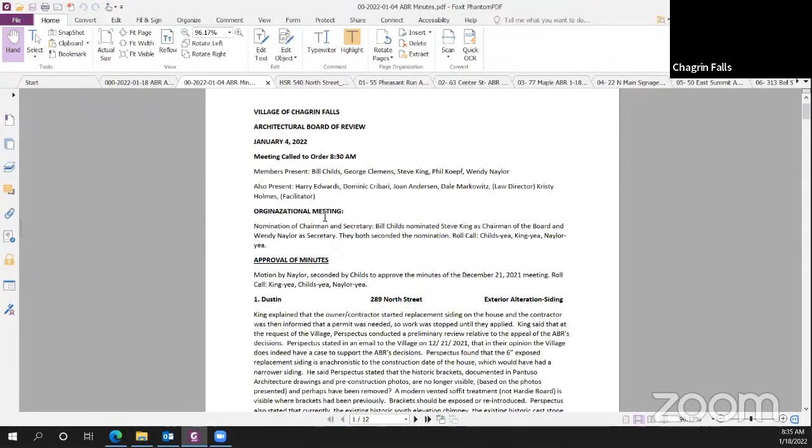Does it say that? Let's see, if you go to the bottom of this. Something in the minutes, because I remember there's a comment from Phil talking about how it only goes to the 4 square portion of the house, but I think you're right, George. We need to clarify that in the motion, that was the intent. Is that what you're saying? Yeah, I think we go all the way down to the motion.

Right, we just want to clarify that the changes we're requesting apply to the historic portion of the house. That'd be the original 4 square. Maybe that is clear enough.

Okay, and then the comment goes to the windows, right? Yeah, the windows were just the facade windows in that same area. Okay, so I think it's clear enough. Never mind, yeah I'm good with that. Are you good with that? Okay yeah, just in case, because the lawyers are gonna hash around with it.

I would add motion by Naylor, comma, seconded by King, and then basis for the decision is 1105.03 A and G, and 1146.01 A and D, as in David. And I would do a similar thing to, is it 65 West Washington?

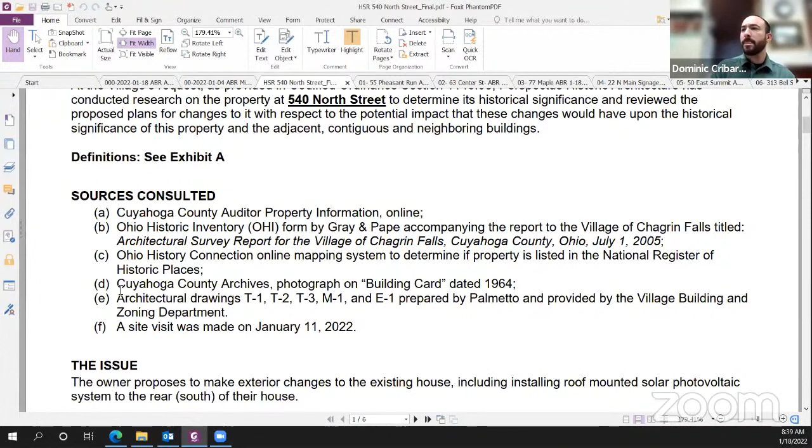The HSR for 540 North Street for the solar panels, you guys saw last meeting. Do you guys want to comment on that and vote on that real quick? Last thing on the agenda, or in the packet, I mean.

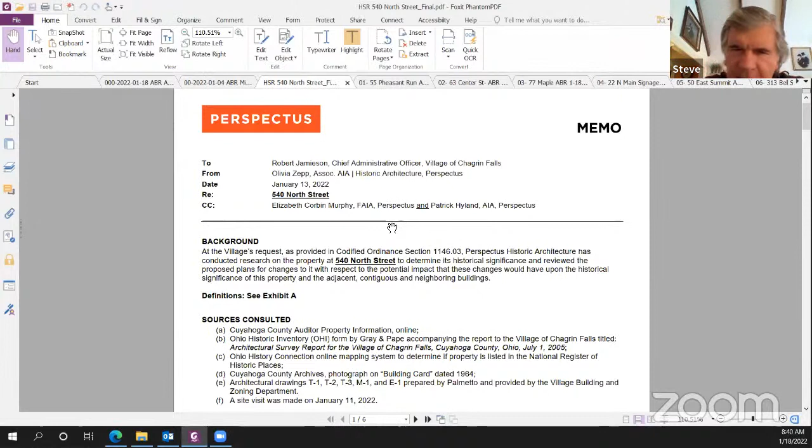Yeah, we didn't get that recently. We had that right after last meeting, I think. I just sent you guys this HSR with this agenda, but this was on last meeting. That was forthcoming.

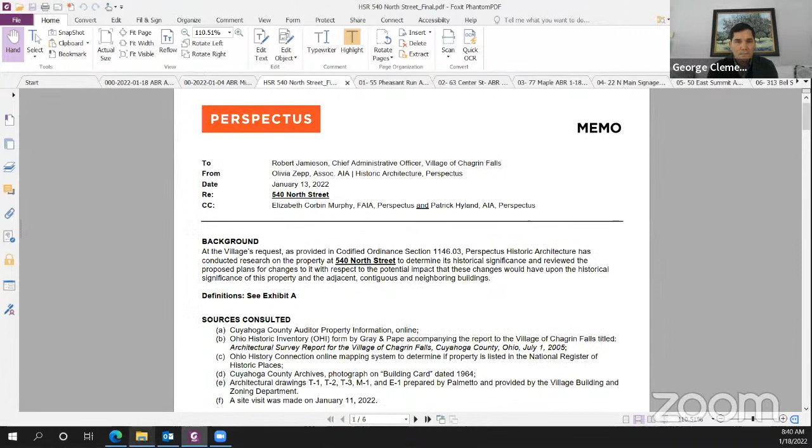Solar panels, I read it a few days ago. Oh, the blue house, yeah. Okay, this is the one where I was trying to figure out what orientation the house had. Right, relative to these. Yeah, we talked about it at length. Dominic, can you mute?

Myself? Yeah, I'm getting background noise. I don't know if anybody else is. It's hard to hear. A little bit, yeah, I hear it too.

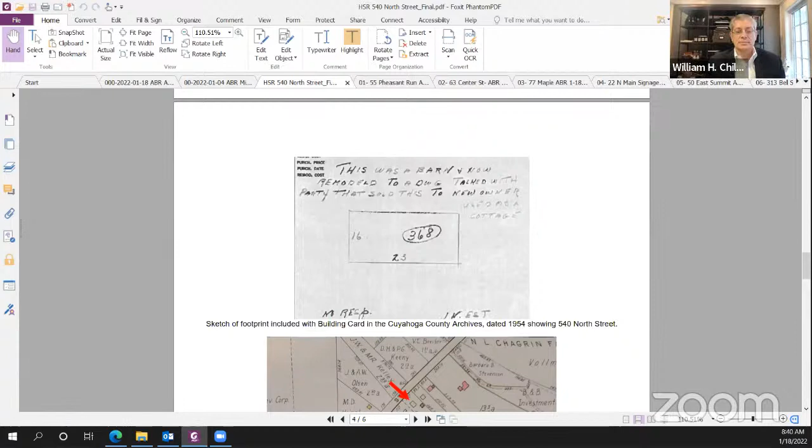Would you scroll to the meat and potatoes at the end, please? Here it is. 540 North Street does not meet the standards of historically significant properties defined in the ordinance. It would not have effect on itself or any historically significant properties in the area.

Move to receive the minutes and the report. Second. Motion by King, second by Naylor. Childs, yes. Naylor, yes. King, yes. Okay, thank you.

On to the agenda, 55 Pheasant Run, new deck and sunroom.

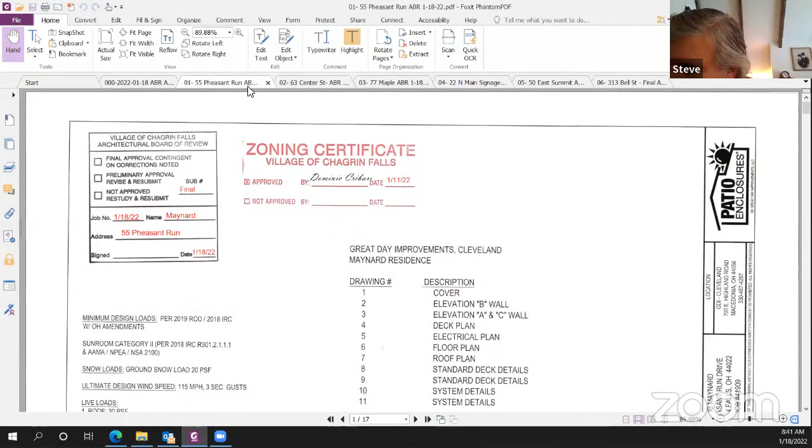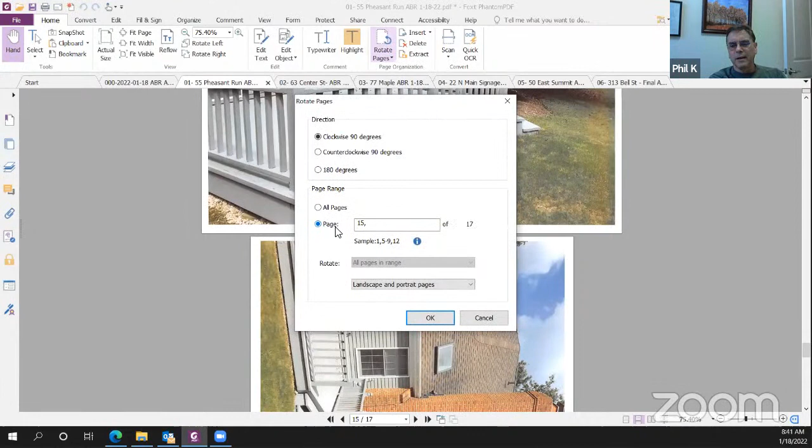Guess I'll start. The first question I have is, does Pheasant Run have an HOA and have they approved it? Yes and yes. That's fortunate.

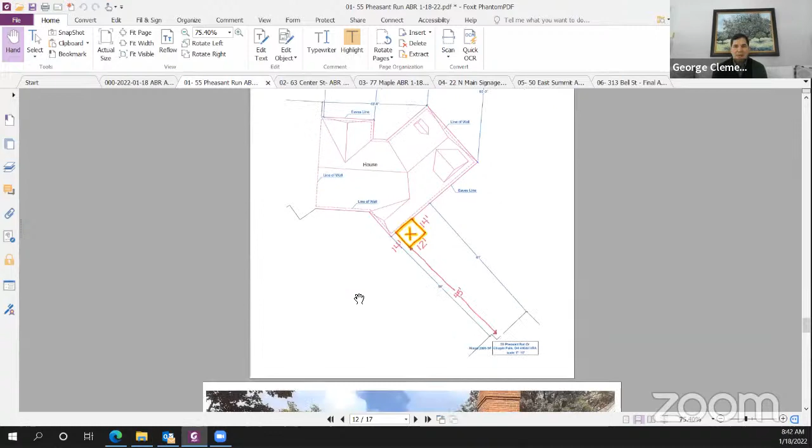Looking at the site plan for this area, there's not a lot of information on this application because they're just showing a portion of the building, but it's a condo, so it's a bigger, longer building. I think the rear of this condo faces a little circle, so the backyards all face each other. So I do think this would be a visible structure from the neighbors in their backyards. That's what they're going to have to work out. And I do not think it meets the architectural standards of the properties and existing construction.

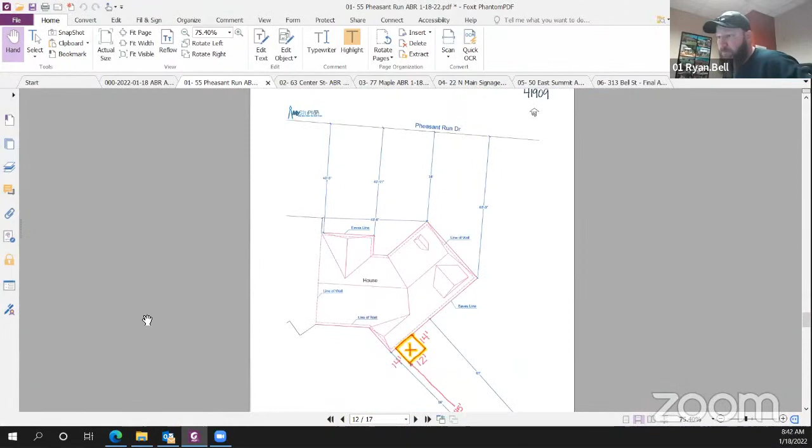May I make a comment here? My name's Ryan, I am the contractor for the homeowner. I completely understand, if you have adjacent properties, all the backyards look at each other. What we're building is pretty much a wall-to-wall glass enclosure. In terms of meeting the current architecture, it's not that we're going to be creating an eyesore. We're not making a circus tent here. We do these glass enclosures for million-dollar properties up on the lakefront, down to the suburbs here. It's a glass-to-glass, wall-to-wall enclosure. In terms of architecture, we don't feel it changes the design of the house or takes away from the architecture or characteristics of the surrounding homes.

I think that's our judgment, not yours. Okay, well, I was just putting my opinion in. That's all.

I don't care for it. I think at the very least, if they did a low slope gable roof form matching siding and matching windows, that would lessen the impact. Windows are sliders, everything else looks like double hung windows.

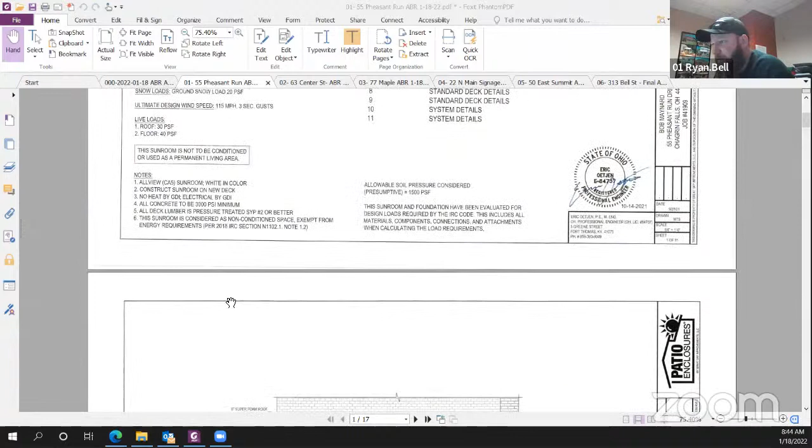So with the siding and the gable, that's all doable, obviously. In terms of siding, the only solid walls would be the foam knee walls, and we could easily turn those to glass and make it an all glass enclosure. The gable front would not have the foam wings, we could do that in glass as well. At that point, you'd be talking about an entirely glazed enclosure.

Now, you mentioned the double hungs, so we can't do any sliders? Unfortunately, our patio enclosure system does not include double hung windows. This isn't an addition, it's a seasonal patio room. It's different from an addition, a stick build where you've got plumbing, drywall, siding, and so on. This is meant to be something that is not part of the house, not a permanent livable space. It's a seasonal patio enclosure.

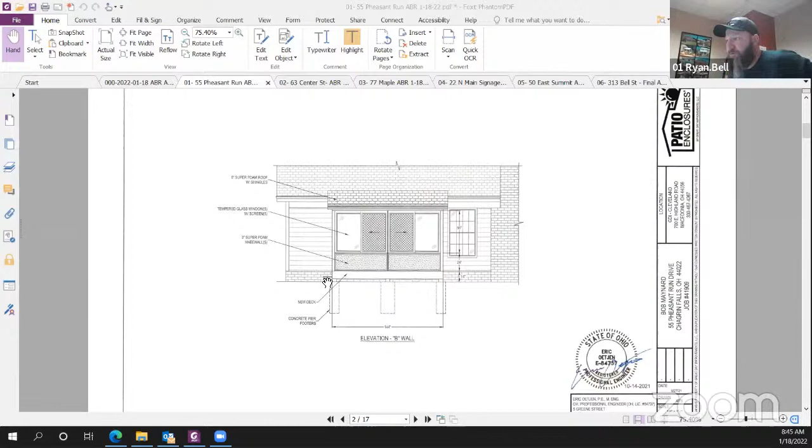It looks like it's not part of the house. It's not an addition to the house, no. Yes, it is. Well, it is an addition to the house. This might not be a project that fits your system.

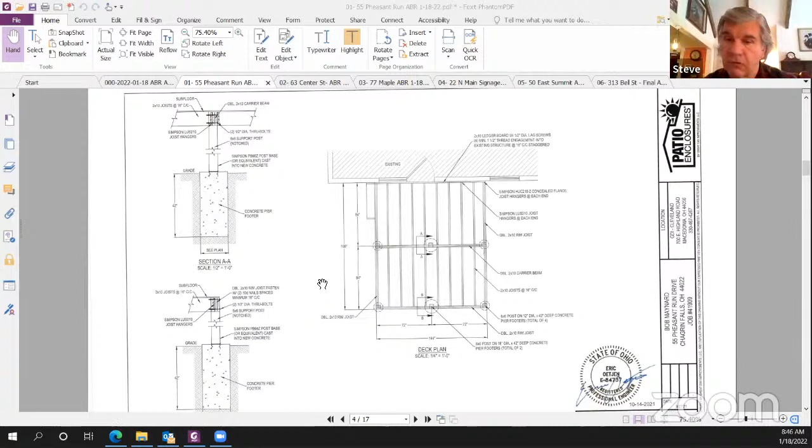Double hung windows, our enclosure system is a pre-engineered enclosure system, and we don't offer a double hung window in our enclosure system. It's different from a stick build. Okay, that's not a great concern of ours. If you're not able to do the project, I understand.

Would you go back to that? So I'm kind of wondering, are you guys superseding the HOA then? Because they approved the look and everything with it. Yes. So you guys would, okay.

Do you want me to go back to Steve? You're saying basically there's really not an opportunity based on your system to do these revisions, correct? So you would either go with this proposed design or not at all?

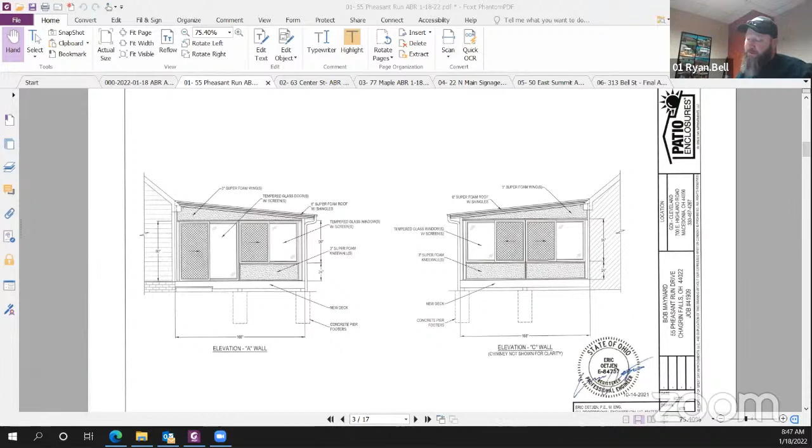I don't know if it's the HOA. So the HOA didn't require a gabled roof, but you, who don't even live in that development, are requiring a gable roof, is what you're saying. And you guys are determining what the homeowner can and cannot do, even though we have HOA approval. You're still denying them the ability to express their own style.

We're here to protect the architecture of the entire village, and that's part of the village. The little local groups have neighbors, and they don't want to crap on neighbors and this and that, so we have to protect the architecture for the entire village. I don't think this fits your system, and I would move to revise and resubmit.

Second. Okay, Bill, give them direction on what they're looking for. Can you guys give full direction on the revised resubmit? What are you calling for exactly? Hold on, I mean you're supposed to tell me, and I'll call the roll, then put the comments in.

So that was motion by King, second by Naylor. Childs, yes. King, yes. Naylor, yes, with the comments including revision to include a gable roof form, and to make the proposed siding and windows match the existing siding and windows.

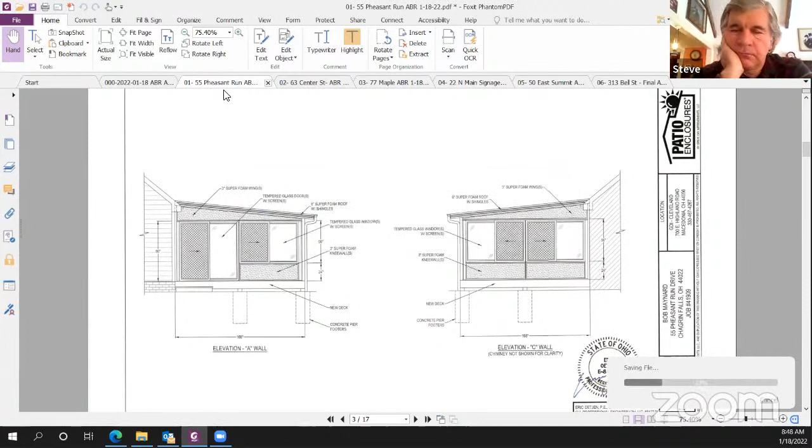Do we have anybody presenting for this? Stephanie's on. Stephanie, if you want to unmute. I don't know if there's anybody else presenting with you, Stephanie. Just let me know, I don't notice anyone else on the attendee list. Maybe raise your hand if you are on this project besides Stephanie.

I am presenting today. I'm not sure if Andrew from Pintuso Architecture is listening in, in case there are additional questions. Stephanie, can you state your name and occupation for the record please? My name is Stephanie Osborne. I am, I guess, a homemaker. I live at 63 Center Street.

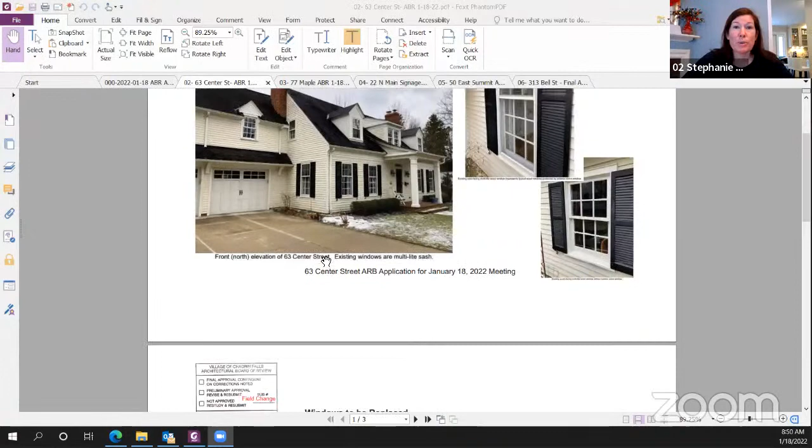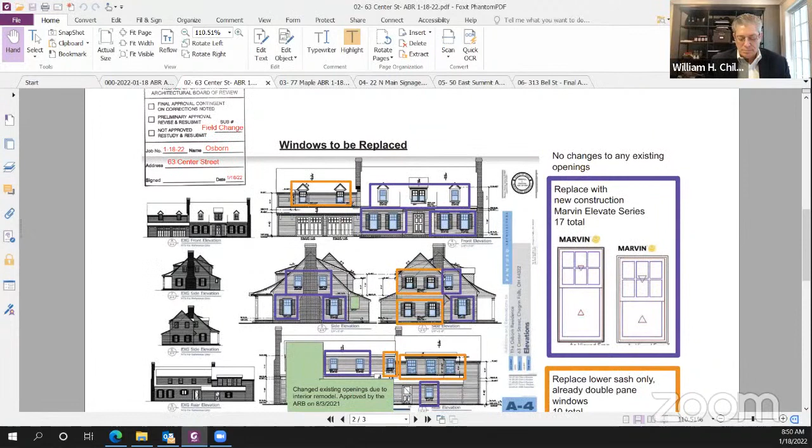Our house here is a Cape Cod style house, built in 1963. I'm here today to ask you to reconsider my previous request to replace the windows with a different style. We currently have multi-light top and bottom sash style windows, and we would like to change those to a multi-light top sash and a single light bottom sash.

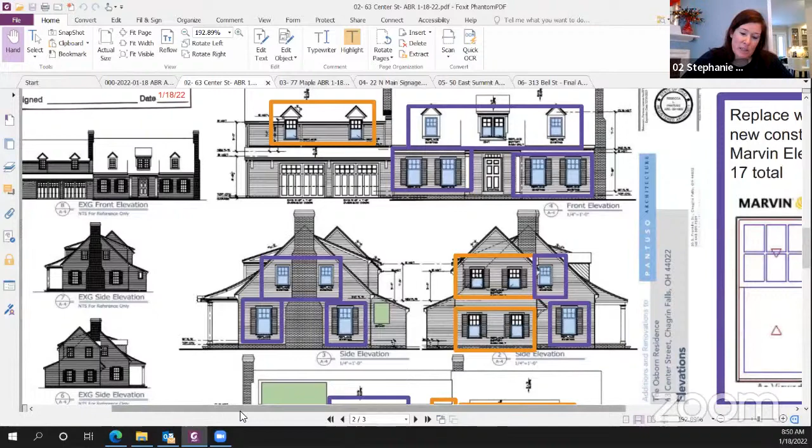The modification, we believe, fits with the existing scale of the home and the style of the neighborhood. We would like to propose to install the Marvin Elevate new construction windows. This quality, energy efficient window will reduce our heating and cooling costs and be better for the environment. Other homes, including century homes directly neighboring our property, and many more homes within 2 blocks of us, have the multi-light top sash and single light bottom sash style windows. Perhaps this charming Cape Cod from 1963 could better complement its neighbors.

The 3 pages of pictures we've submitted: the first shows our existing windows, and the second shows what we would like to replace them with, the Marvin Elevate. 17 of those windows would be the new construction Marvin Elevate, and 10 of them are from an addition about 12 years ago, so we would just replace the bottom sash to match the Marvin Elevate. The ones outlined in orange are newer double paned windows.

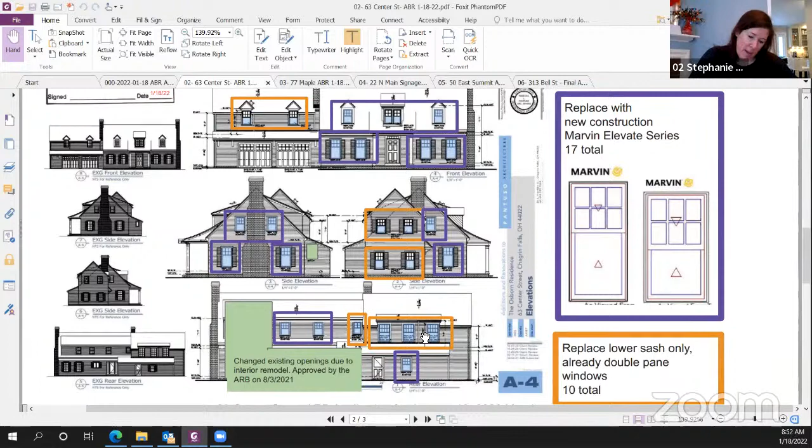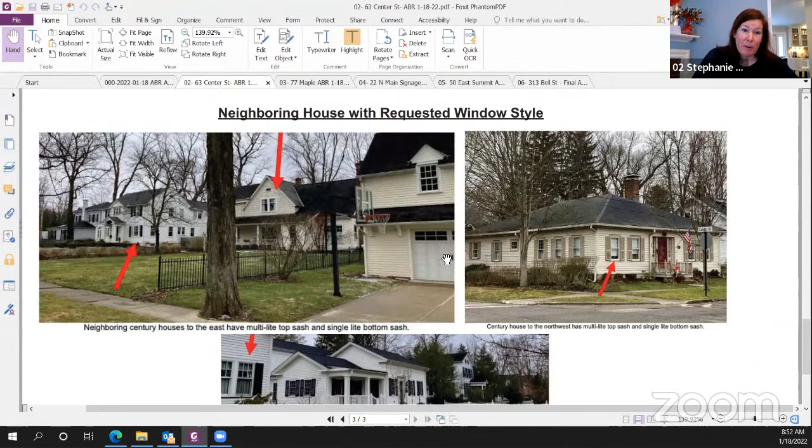On page 3, the last time we met, Mr. David Griffith's house was cited as a notable architectural gem of the village, and I absolutely agree with that. That house is 2 doors down, shown in the first picture on the far left with the first arrow coming up from the bottom. That certainly was an inspiration to me in coming up with this idea, since they themselves have the multi-light top sash and single light bottom sash window.

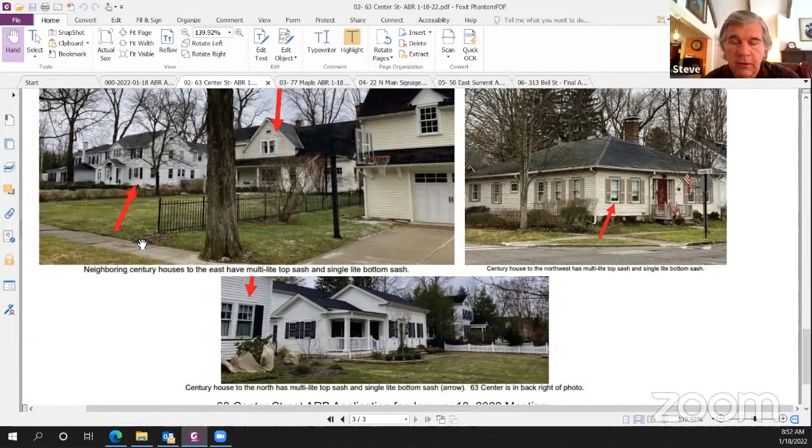We view each house separately, and they have different architecture and different needs. The one in front of us is a cottage looking house, and it has cottage windows, which is sort of the vernacular for what you're talking about.

So every house is different, and we judge them accordingly. In this particular case, what's great is we do have in the HSR a historic image of your house, which is beautifully built. It blends so nicely into the village, quality materials. And I see where the windows were installed as true divided lights. I believe that's what I'm seeing, right?

So just to reiterate, we know what the existing window configuration with this house is. And so I would recommend going back to what was shown. You could do aluminum clad, you could do simulated divided windows. You don't have to do the true divided.

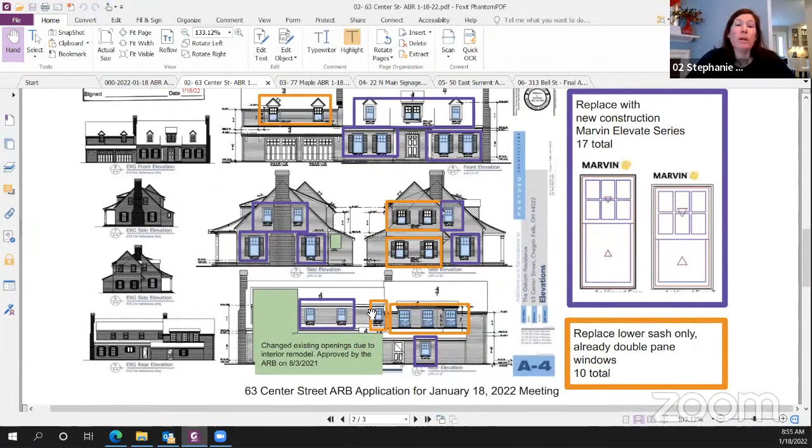Okay, so just for architecture in general, I was wondering, does architecture evolve, or is it always in the moment and does not have some wiggle room? It's black and white, yes and no. Well, we do each house individually, and eventually we give you our opinion, and that becomes black and white.

Okay, so there are no options on windows for this house. There is only one style that is acceptable. You can put in very energy efficient windows that will fit the house and be very beautiful.

Yeah, and I think for this case, that's a Cape Cod, and that for sure has the double hungs with the muntins in the top and bottom. I don't think that style can start transitioning and be a different style. I think you want to keep the purity, and that's what makes Chagrin Falls so great. You have these great historic houses that capture their time period, and that's why everyone loves to come here. It's the feel, and I don't think you really want to lose that, like a lot of the other communities have throughout Northeast Ohio.

I do appreciate the architecture and know that you help preserve that, I guess. Buying a house from 1963, it was modeled after a Cape Cod, right? I mean, it wasn't built in the 1800s or something. Right, but it has the massing and the characteristics, the dormers.

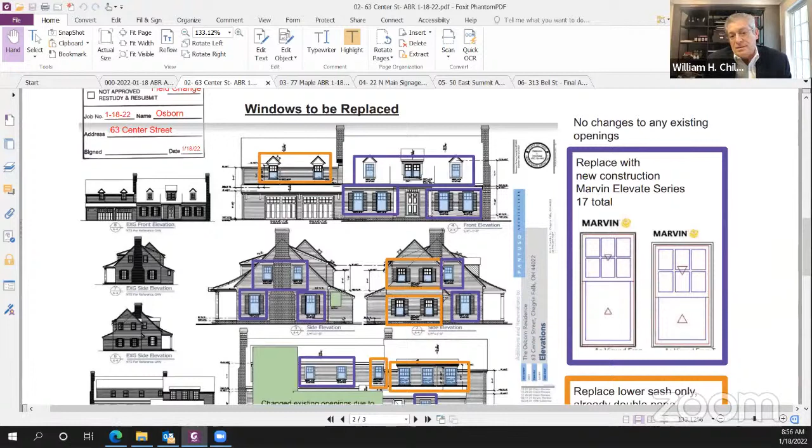If you look at any type of book that has styles and things, this book is pretty dead on, it would show you that this is Cape Cod, and it has all the characteristics and the features and the massing and the composition of what that house would be. It is a beautifully done house for that particular era, 1963. And it is advised that you stick with that character. When you start to break from that, it starts to take away from the historic value of that house, and you are entering into that historic era. So yeah, I would stick with the multi-pane.

Okay, well, it was noted in the historical report, if I read it correctly — it's the first time I've been exposed to a historical report — that by adding the dormer in the middle of the front and covering over the front door, that eliminated it from the National Historic Register. No, absolutely not. That does not destroy the character of the house. It does not eliminate it from qualifying as a contributing resource.

Okay, Dominic, did we have a previous ruling on this? In August. And it was, I'm sure it was no, but... do we reaffirm it, or do we do a new motion? It was actually back in March last year. Yeah, there was one before I was here, in March. Yeah, like she was saying.

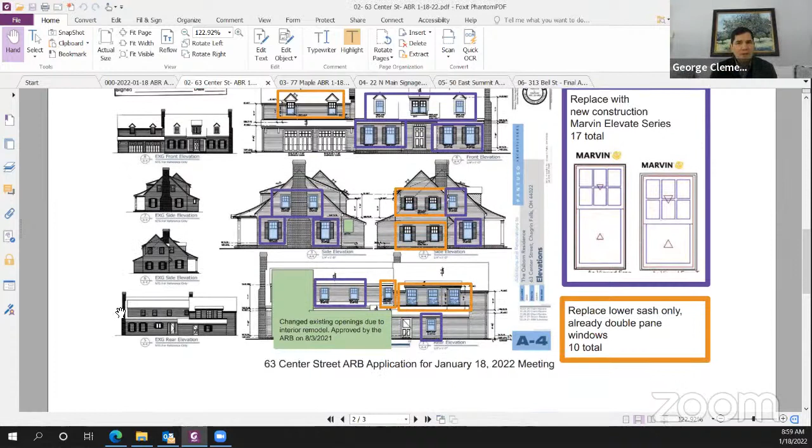Were they presented as 6/1 windows at that time, or 8/1 divided top? At that time there were kind of two parts of the project: the overall windows in the house, and the interior renovations that affect the backside of the house. So the decision got broken into parts, and the renovation part was approved, but changing the light from multi to single was not approved.

With the comment about Mr. Griffith's house, I wanted to be heard out again on these windows alone, which I appreciate. You're pointing out that March minute, which I think is helpful.

I think it's actually helpful for me to understand that it's really the Cape Cod style that's dictating the divided light top and bottom. I think what you're proposing is pleasing, and it's understandable why you'd like that. There are many houses built earlier than this one that have the 6/1, which is what you're proposing now, but it's really more specific to the Cape Cod style. Maybe that helps you, as it helps me understand exactly where this is coming from.

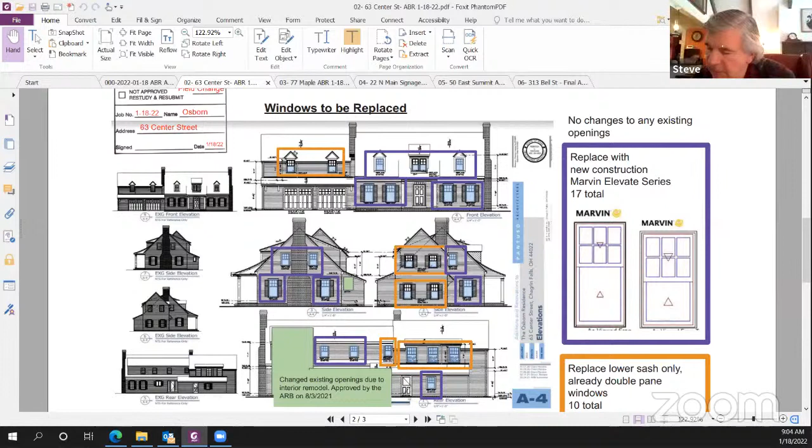77 Maple Street: new steps to the front porch, HSR on file.

I don't know if we have someone presenting this. It sounds like someone's here. We're just waiting on Katie to switch out Miss Osborn. Iris, here I am. Alright, Osborn's still in though.

What does the HSR conclude? That HSR was from a previous submission for the porch. Do you remember what I said? Harry's going to bring it up real quick. Steve, if you recall, the previous submission was for the porch. The gentleman who was selling the house made like three renditions of windows and stuff like that, and I think you denied them.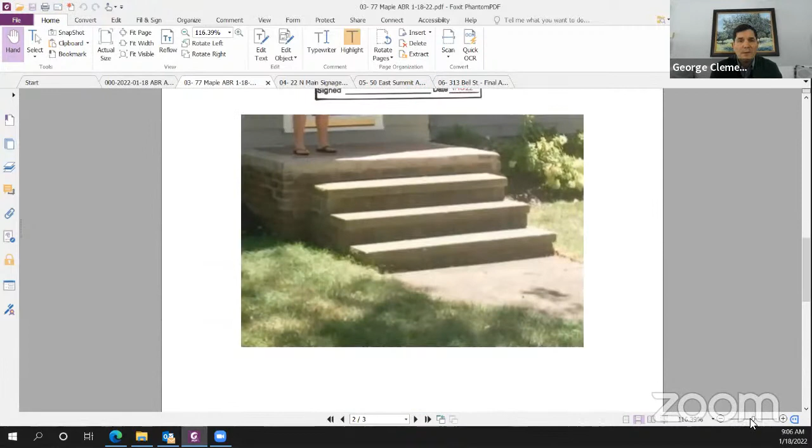I think that making those into either stone top brick steps or brick top brick steps, I would consider that to be an improvement to the house. I do want to note that you haven't gotten as far as having drawings on how you do that - those brick steps will need a foundation. The top landing would be a minimum of 36 inches wide. So the steps you have there don't really conform because you've got the steps right on a door and they want a 36-inch wide landing. I think that would be an improvement as well.

You also need to show that you're either moving the existing handrail and keeping that, or you need a handrail because you have more than two risers together, so more than one tread. The handrail now is damaged and it will be replaced. You should show a new handrail. Based on that, I think the steps we're looking at are not historic - they've been replaced - and making them into masonry steps would be more long-lasting and more successful, I believe.

So when you said, George, the top landing 36 inches wide or deep? Wide or deep - projection from the house being at least 36 inches, so as you walk across it, that gives you a legal landing. It's 36 minimum - the code requires that where you have a door that opens out... No, it opens in. Oh, it does. Okay, because if it opened out, it would need to be 36 inches beyond the door swing, right? Oh, that's true. Yeah.

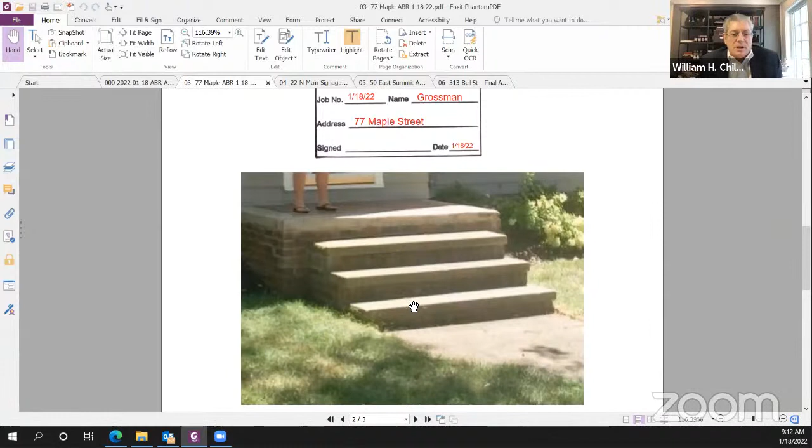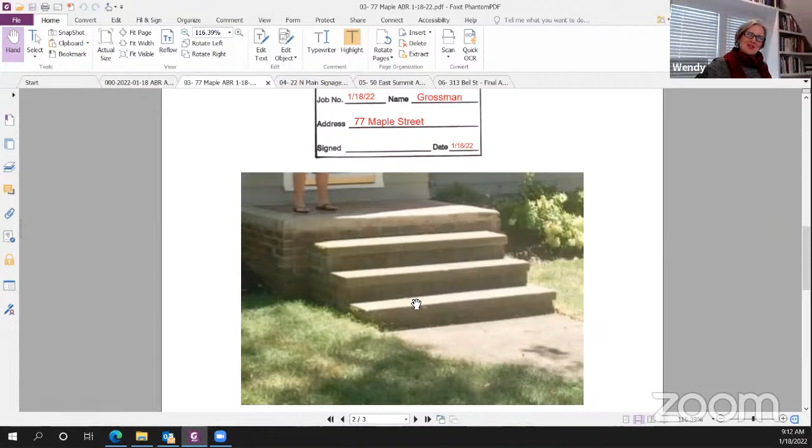It might go more with the rusticated concrete block on the foundation, since that has more texture, so it might be more appropriate. Limestone can be slick, and brick is less slick but harder to shovel. Or sandstone—we've all lived with these materials. It's all kind of in the finish of the stone too; usually it's got good tooth on it, so it's not that smooth, and therefore it's okay.

Do we need to call the roll? Do we have a motion and a second? We have, I believe, revise and resubmit—motion by King, second by Naylor. Childs, yes. Naylor, yes. King, yes.

To revise and resubmit, and thank you. For the record, could I get your name, sir? My name is Ira Grossman. And you are the homeowner? I am the homeowner, yeah. I didn't want to just assume that. Thank you very much, have a great day.

22 North Main Street.

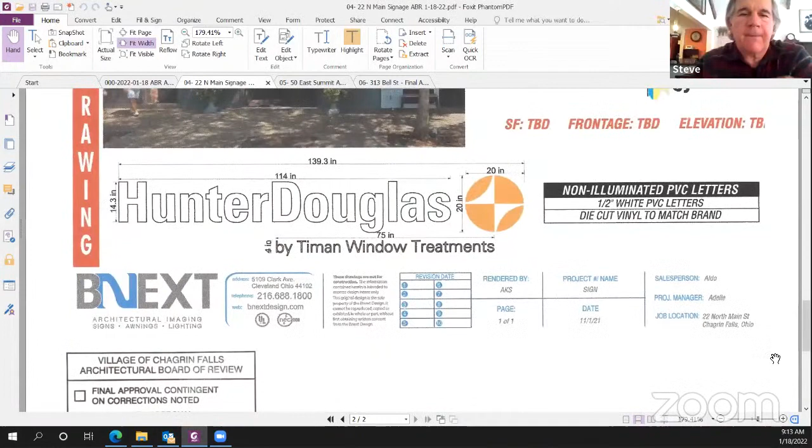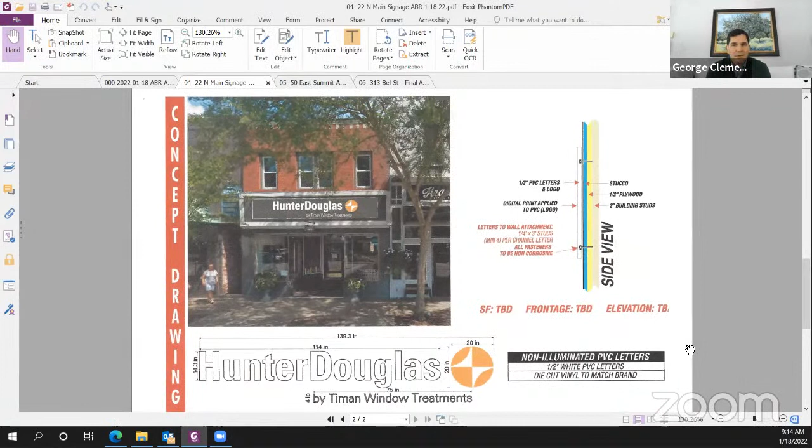I don't love that font and look, but I assume it's very striking—that's their logo. And just because I like the way Heartwood looks way better than that doesn't mean they shouldn't have a sign in town, I guess. So maybe smaller.

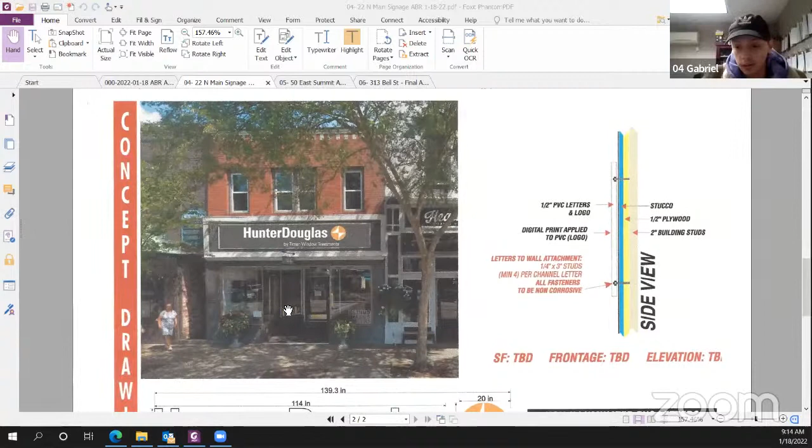Who's representing the digital print sign company? Is anybody here? My name's Gabriel, I'm representing—I'm the installer here. The approved drawings are right there, under my name, for Advanced Installation Service. You represent the sign company? Yeah, the installing company. Gabriel, what's your last name for the record?

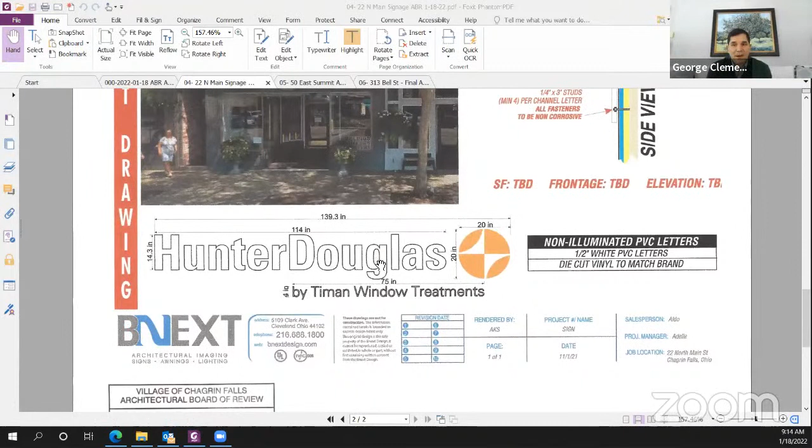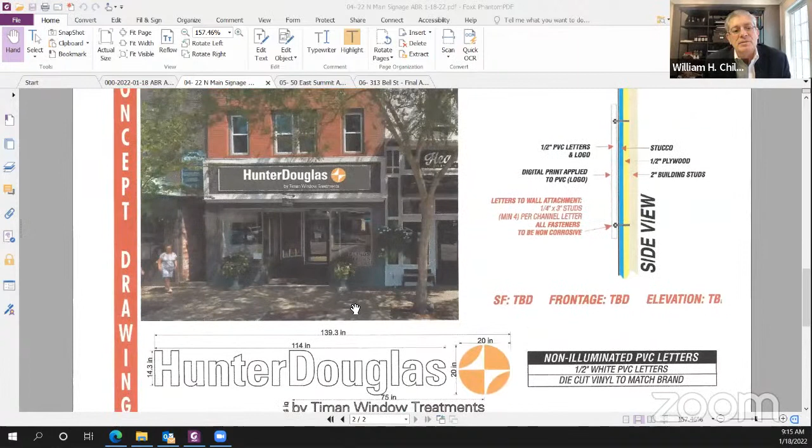Bartlett, Gabriel Bartlett. Could the Hunter Douglas part be a little bit shorter? It seems really bold and stands out quite a bit—maybe a little smaller. Just a thought, I don't know what everyone else thinks. I don't have a problem with the sign either, and I realize that's their logo, but it just seems pretty heavy.

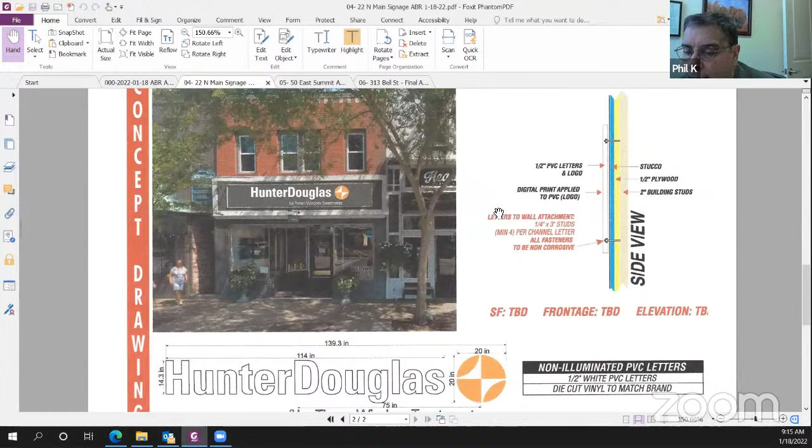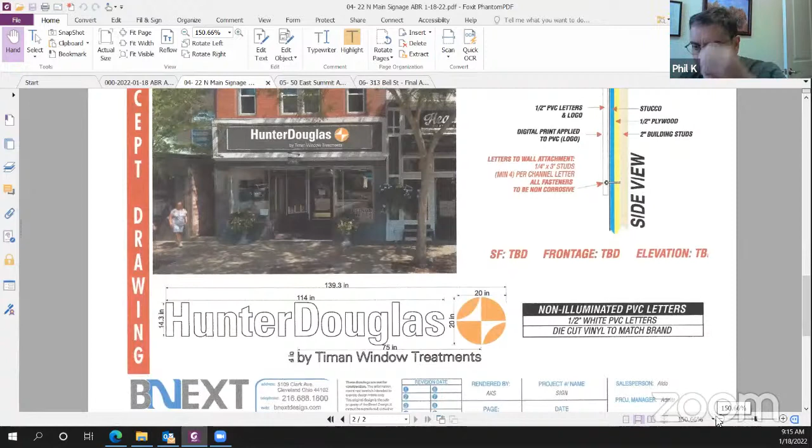My problem is not so much with the sign as the sign band. I know the building was sold—a client of mine owned it—and they're contemplating renovating the storefront. So my recommendation would be that when they do that, they make the whole sign band smaller, and then I think the Hunter Douglas sign would actually seem more appropriate, even though it's pretty big.

How about the Hunter Douglas text underneath the photograph? The black on white—right underneath the photograph is Hunter Douglas with their insignia, and that would be less bold, with a white background. That's really the difference—hollow letters instead of solid letters, whatever you call that font.

Are you just using the existing frame and replacing the letters? Is that what's going on? Yeah, that's what they're doing. They're contemplating a change to the facade—that's what I was told. I was contacted by the contractor who works for the new owner.

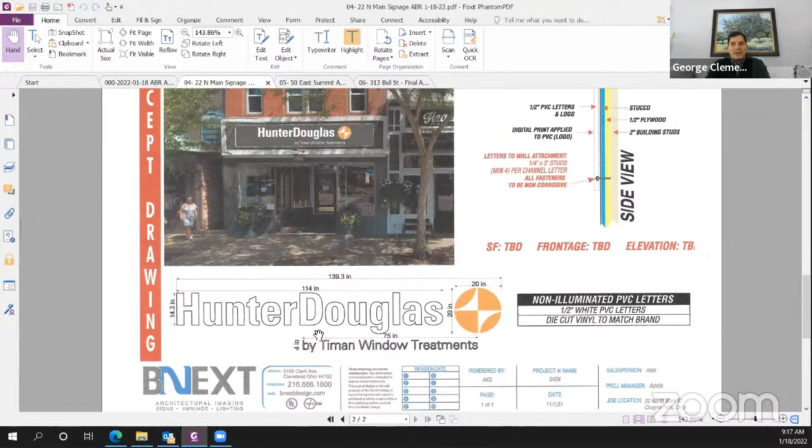So when you're referring to the sign band, Phil, you mean the brown surrounding everything, sticking out 8 or 9 inches from the wall? Right, it is awfully heavy. That's existing, huge. And the interior pin line around the front is existing too. So we're stuck at the moment—potentially a white background or smaller, and then we could address the sign band when the renovation is proposed.

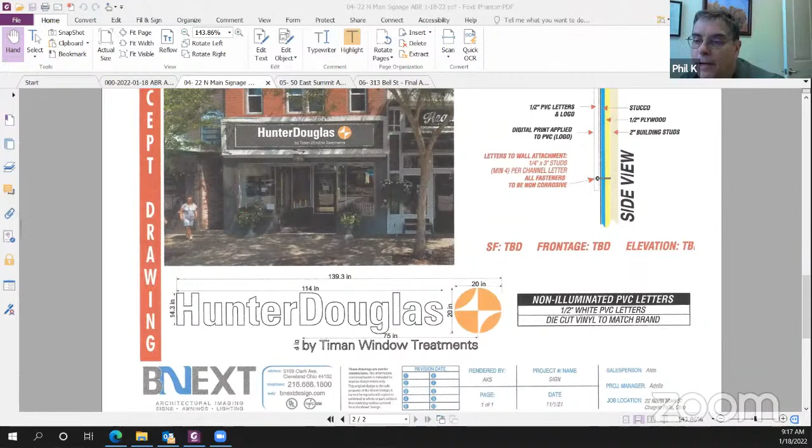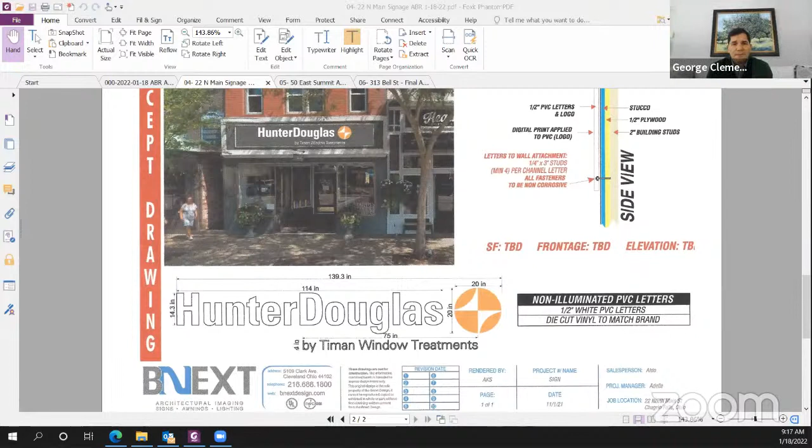I don't know what they do in the meantime. I don't think we can wait on a proposal that isn't actually proposed. But what I'm saying is we could ask that the sign be on a white background or a little smaller. And if they do that on a big placard or whatever, if they come in later, we can't ask them to change the sign band now, I don't believe.

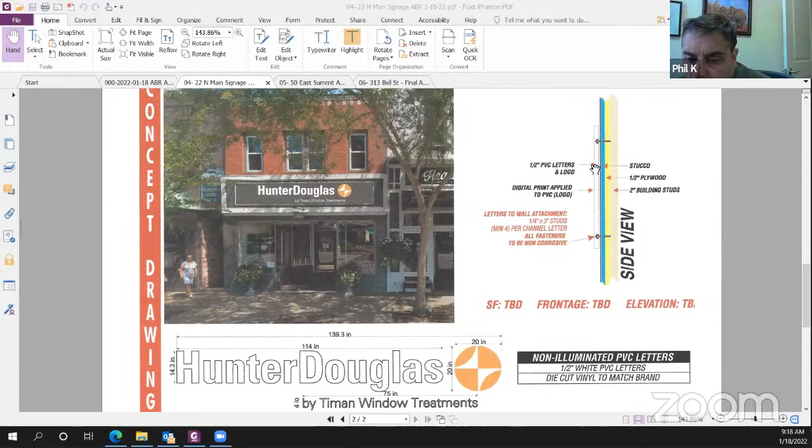So if they come in for a renovation later, then we can ask that the sign band be scaled down and they could reinstall the sign on the new sign band. Are they, Gabriel, installing this on a new background? Meaning, are you just doing the letters and logo, or are you doing a backing board? Oh, okay, I see your question now. Let me look over this real quick.

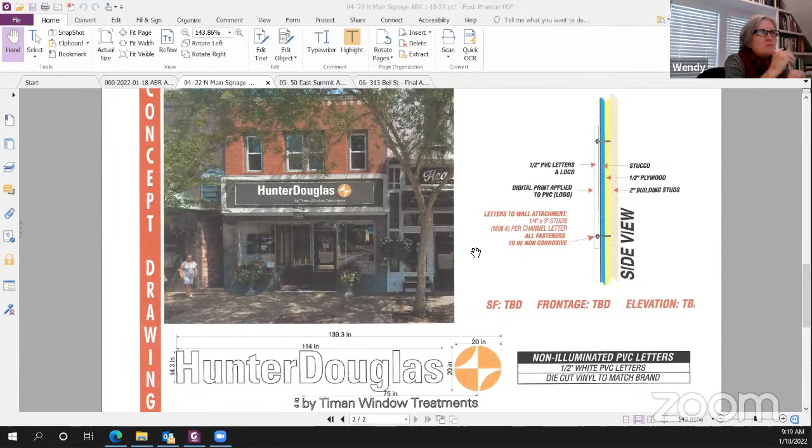It's just that the way the Timan sign is there now, the letters are scaled down considerably - it's a large T, but then 'Timan Custom Window Treatments' is much smaller lettering. This Hunter Douglas that's being proposed reads very much larger to me. If we agree, we could just scale the letters down, scale the whole thing down a bit, I think it'll look better. You could leave 'Timan Window Treatments' the same size and maybe scale the Hunter Douglas.

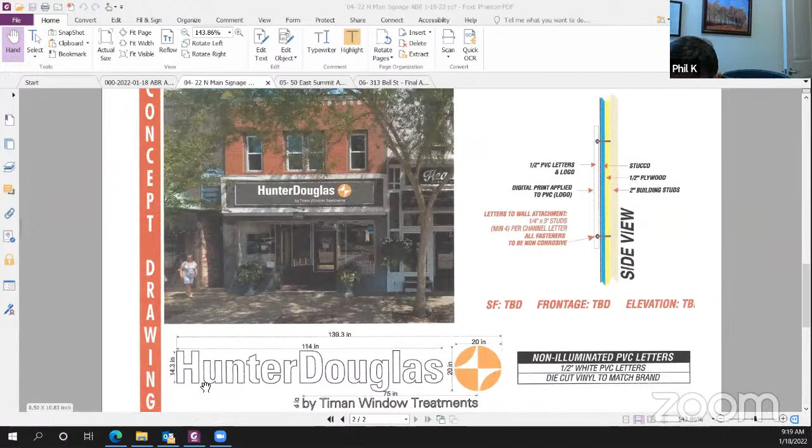That whole part of the sign is 139 inches, and if it were, say, 100 inches... just bring it down. We're talking about dropping the letter heights down from 14 to 12, or maybe 11 - just to see what it looks like.

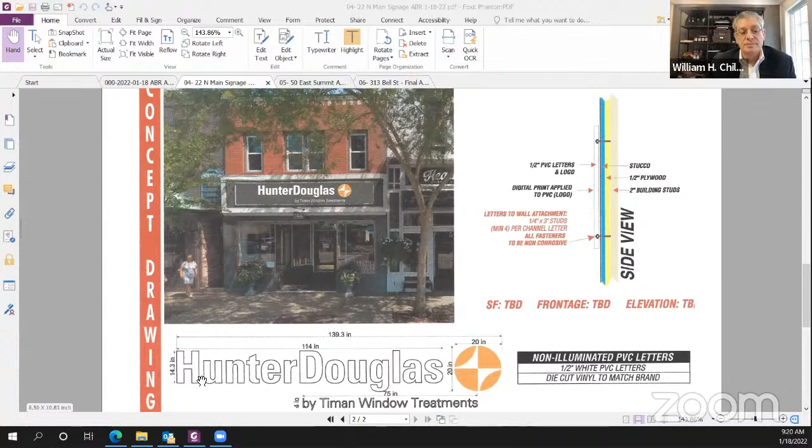I move to revise and resubmit, given those comments. Second? Motion by King, second by Naylor. Childs, yes. King, yes. Naylor, yes. Motion to revise and resubmit.

Very good. See you in about two weeks. Awesome.

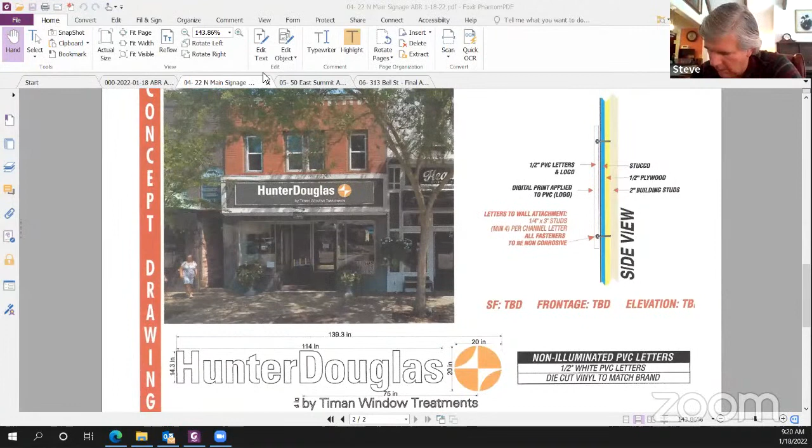50 East Summit, Clarke. New rear addition and screen porch in the rear of the property. Why are we looking at this again? This is the rear yard addition. Yeah, this is a completely different project, Phil.

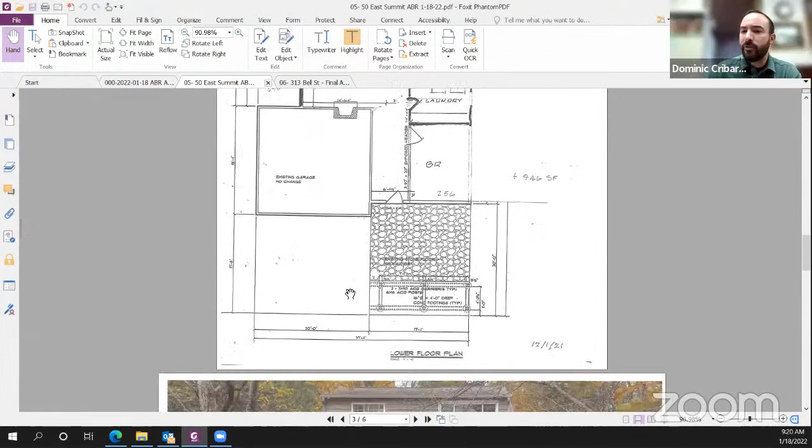I think the front - Mr. Gates had walked in. Oh, he did a walk-in while he was submitting for his variance. Now that his variance has been officially submitted, and he took the comments from the board, he proposed a new drawing here on the rear.

So, Mr. Gates, if you can unmute yourself. Brian. Can you hear us? No. You might need to turn up your volume or turn on your microphone on your end, Richard. You there, Richard? I'm right here. All right, there you are now. I don't see you. We don't see you either, but we hear you, so that's something.

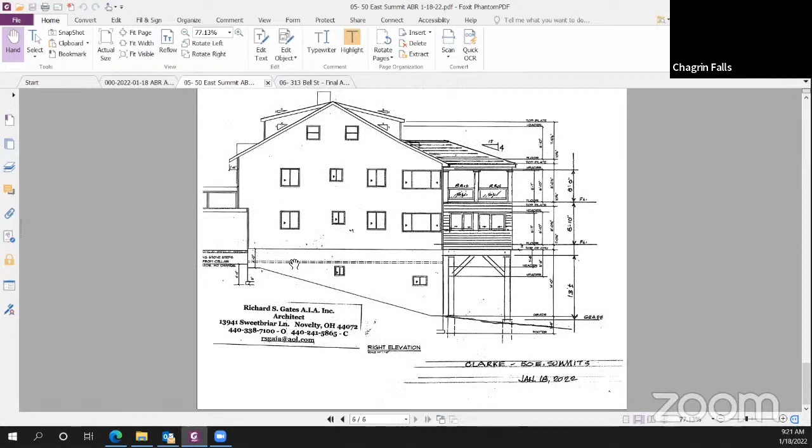I don't know where the button is to share screen. Can you see my screen where I'm showing your drawings? Yeah, okay. Richard, you can always unmute your camera. Where do you - kind of in the lower left, if you move your cursor around you might see something pop up that says 'start video.' Click it one time and make sure you don't have a cover on your webcam. There you go, you're here - success!

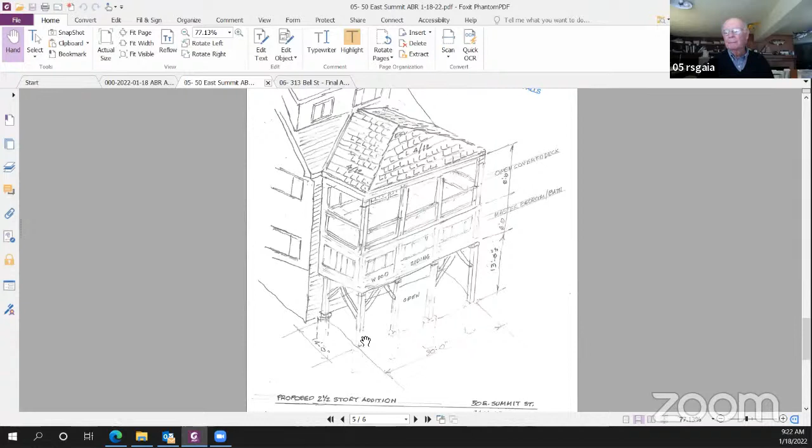This is Richard Gates, I'm in my office at home. So when we walked this in the first time, there were some comments - my original sketch was worked from standing on the ground and trying to guess what's going on with the roofs. In the meantime, we've done an aerial view, we've field-checked it, and revised the drawing to look like what you're looking at now. So the upper level is a covered porch, and the lower level is a master bedroom and bathroom addition.

Sure, master bedroom and bathroom addition. Okay, so you've got a roof over that addition underneath your porch.

Correct. I'm not sure I saw this last time, or at least I can't remember the walk-in. You weren't there, George - it was right before Christmas.

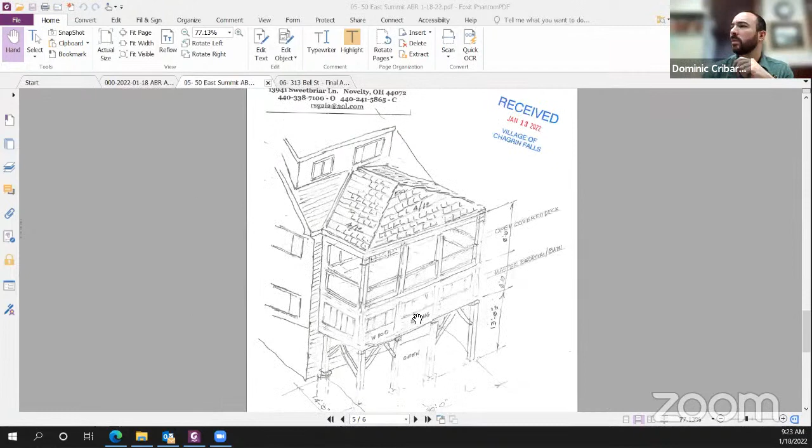Okay, so my comment is, looking at the existing rear of that building, I do think this addition is going to add a lot of dimension, which would be welcome. And the horizontal siding seems like a good solution. The hip roof actually seems like a pretty good solution to me.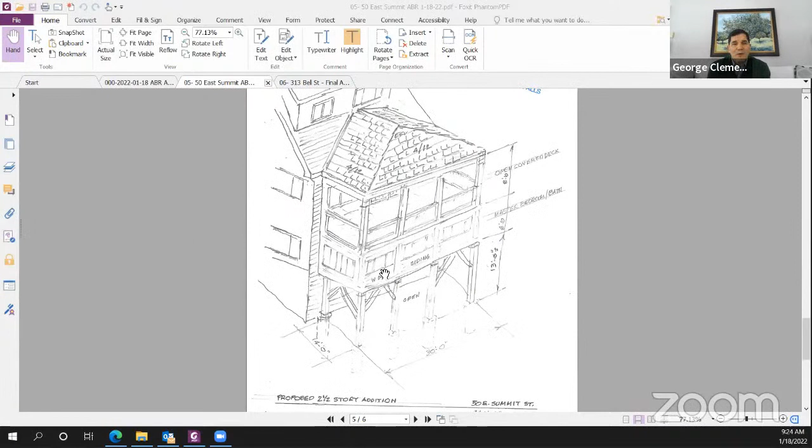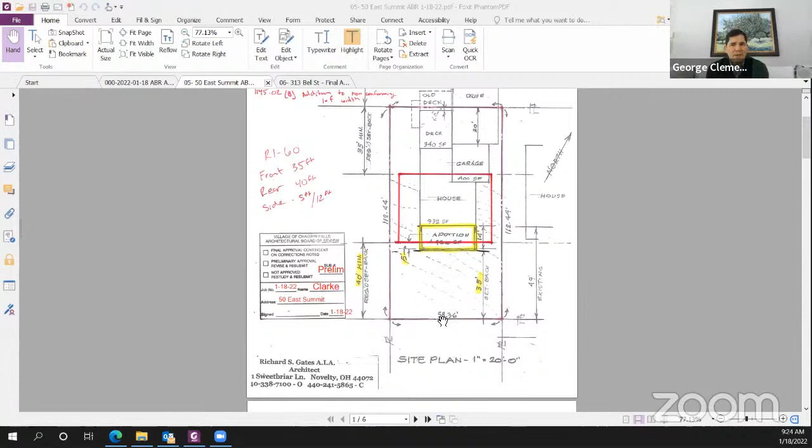What's the variance request for, Harry? The rear yard setback, 5 feet, leaving 35 feet. But what you're looking at now is this huge blank thing, and this has a lot more going on. Oh, it's much more appealing. Yeah, I agree.

I move to preliminary approve this, looking forward to seeing the drawings. Second. Motion by King, second by Naylor. Childs, yes. Naylor, yes. King, yes. Plans have been preliminarily approved.

All right, thank you guys. Thank you, Mr. Gates. We'll be back to see - we have to get this thing zoning approved first, and then we'll be back with the final drawings. Very good. Okay, thanks for your time. Thank you.

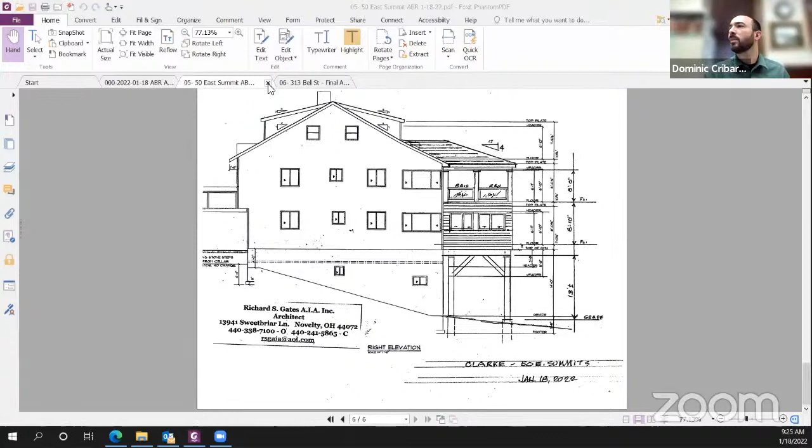313 Bell Street. The addition, the front porch and side porch addition.

Pretend I'm moving around to the front of the table. Katie, can you remove Richard? Yeah, hi Richard. Hi. Now go figure out how to turn it off. Yeah, go away, I don't know. You guys get rid of me, I don't know how to do it. Pull the plug, put your little screen over, put a piece of tape over your camera, and then don't talk. Should say, Richard, if you can, it should say leave meeting somewhere by the bottom right corner. There we go. There he goes. Okay.

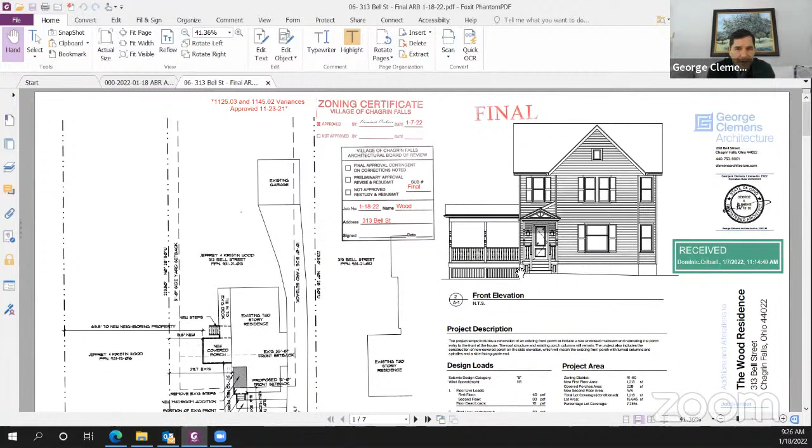Okay, so you saw this porch project, and it was very similar on a preliminary basis. This is back for the final submission, and although it has not changed much, we really did look at the comments closely, and I just wanted to assure you that we took the comments of the board seriously in terms of the porch and the porch posts.

We like - if you added one more post and broke that into 3, there is something nice about it. But my concern was originally, and it remains, that for a porch of this size, we're going to get a little forest, a little thicket of posts, and in reality it will be less pleasing with too many new turned posts. So that's why we stuck with the post configuration that you see.

We have the porch that projects from the side. I think the entry porch that we're partially enclosing into a mudroom - I'm excited about that. I think it's actually an improvement because of turning the steps to face the front, leaving the original roof and posts of that porch, so I think it takes the historic fabric and makes it work a little better. It also makes the door a little more prominent, brings it forward.

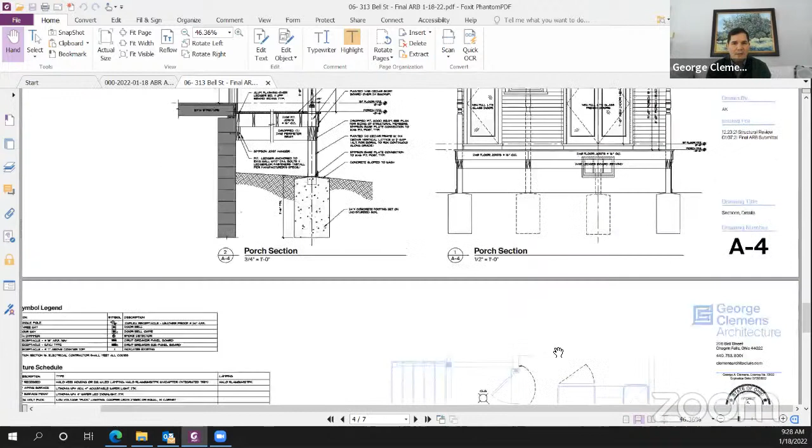But the side open porch is 14'8" front to back from the front of the house, so it's not projecting right there at the front. I think this element is really critical for these guys to be able to enjoy this wonderful side yard they have. They have, I think, 25 feet to another 50-foot lot which they own, so we're looking at 75 feet of open space there, and I think this nice open porch is going to give dimension to that. The reason the porch is sized the way it is, is so that they can actually have a couch on that porch to view that big side yard and enjoy it.

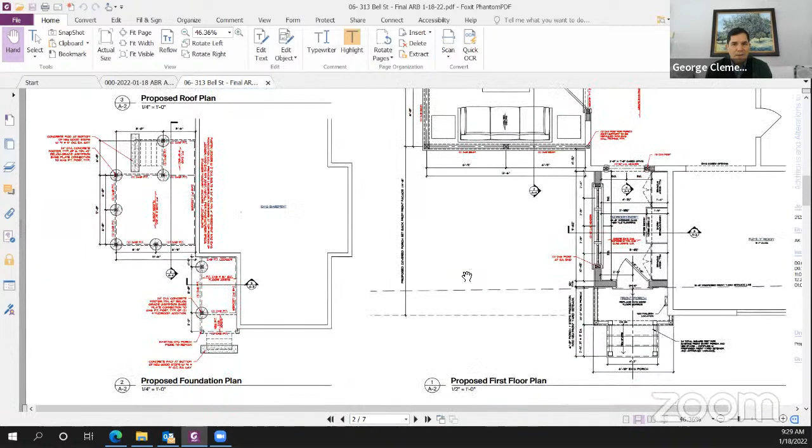So we are trying to scale the side porch in a way that works best for the Woods, and we think it looks nice. It's about a square, running with its side facing the gable, and I think it's successful at that dimension. Those are really the elements: the open porch, the new mudroom enclosure of the existing porch, and moving the steps to face the front.

I like how you added the little mudroom entry. I like the whole thing actually, because in a time when we're seeing these tiny little houses with huge unmanageable porches, this is scaled well for the size of the house.

I understand that we might not be sticking to the column spacing that works classically, but I agree with you that you don't want a forest of posts on a 14-foot square porch, or whatever that is.

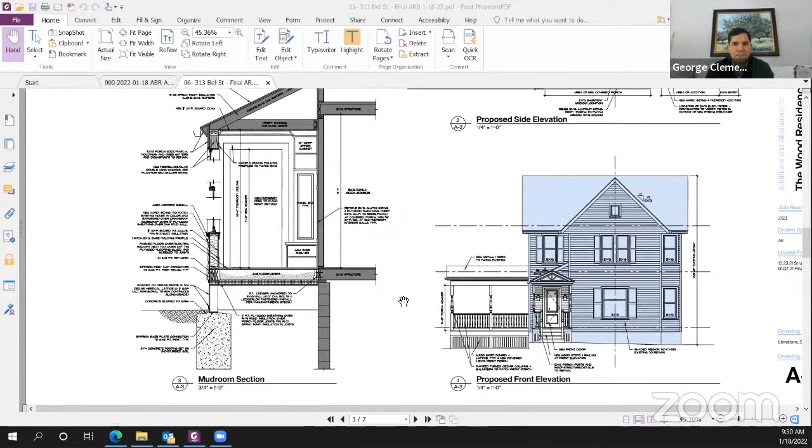I just think I like it. I like the transition. I can take or leave the decoration on the gable end of the porch - I don't know that it adds a lot, but I love it on the front entry. I think that's pretty, it adds something to the front of the house. So those are my comments.

I agree with Phil, I think this is really well scaled. Thank you for that. I think it's a relatively modest porch with what could have been going on over here. I went up and took a walk to take a look, and there's a very flat plane on that elevation as well.

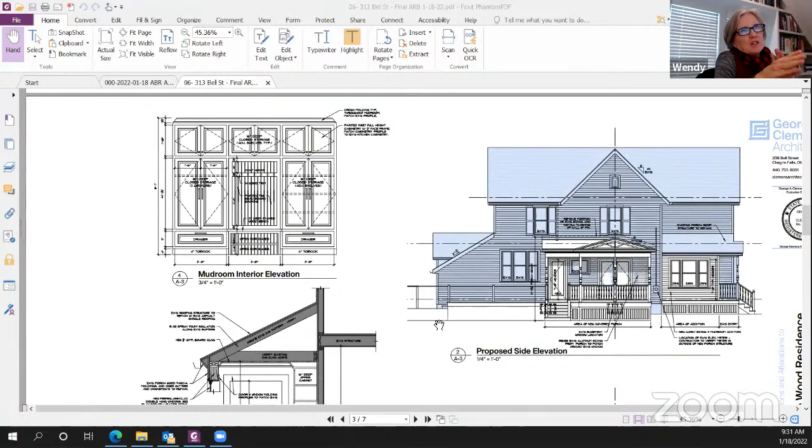So I think it does a nice job breaking that plane. I have a couple minutia-type comments where you're entering the single door from the steps, and you've got the rail - right there at the proposed side elevation where you're entering, the rail continues without a post. I defer to you as the architect, but can you widen the steps and just have no rail, that little piece of rail to the left of that post? Because that looks funny to me, having that little railing sticking out there. It doesn't kill the design to me, it's just something that I saw.

The other thing is, I understand you're trying to do a single man door into the kitchen and then double doors into the piano room. On those sliding doors and the single man door, is there any way to mimic the front door where you have glazing on the top and wood panel on the bottom, even at the double doors, just to break it from having all that glass on the exterior? Have you thought about that? I think we were looking at bringing light in. Yeah, I would say the single door could - I mean that's a great comment.

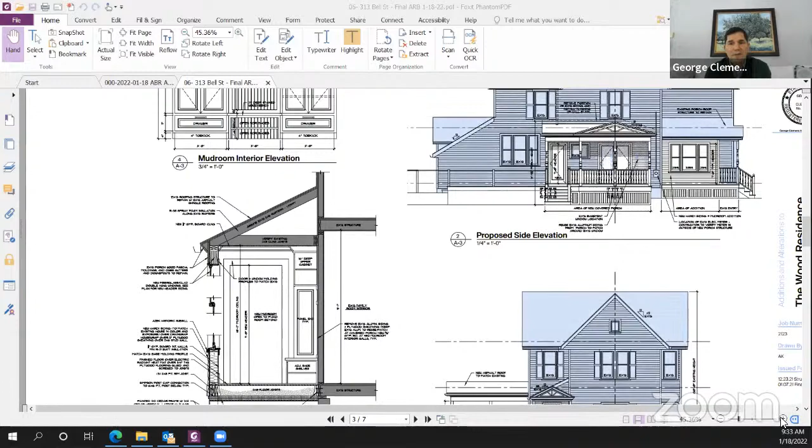And I think the single door could benefit from that, and also the light coming into the kitchen is already up higher there, so a half light approach, or even a third, like what's on the front door. Yeah, I think that could be very nice, and I agree with that. I think the French doors, it might be nice to keep them glass. I think they're going to be kind of tucked under the shadow of that porch, and we're trying to get as much light into that room since we're roofing out over the porch. I'd try and keep those.

Yeah, and with the sliding and glass doors, what my thinking always is - I recognize I'm in the weeds a bit, but I'm just trying to get some clarity - if you're coming up the street in the evening and people are in the house, you're going to see that sliding glass door lit through the porch, and the French doors through the porch area, as well as that man door. So you're breaking the fenestration pattern that you've got going on the house.

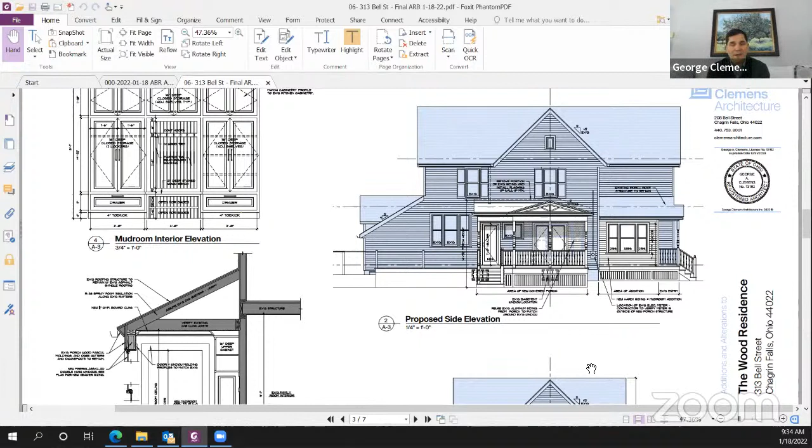I do realize this is set back from the road, I'm just asking that you think about it. We could study those - we could even look at, if they were full light, a mid rail or something in there that might break it up a little bit. But I think this is really nice, they're going to enjoy the porch.

I think that because it's set back, I understand. I really like French doors - even though they're maybe not something you would have ever seen in a house like this, but we are trying to bring this into the 21st century, and glass is important.

I think your hand was on the mic.

I'd like to show you this door, if you can see it, Corbin. That's an old door, and it might look pretty cool in a house - a top half glass door with an arched top. One consideration - I think the project is wonderful.